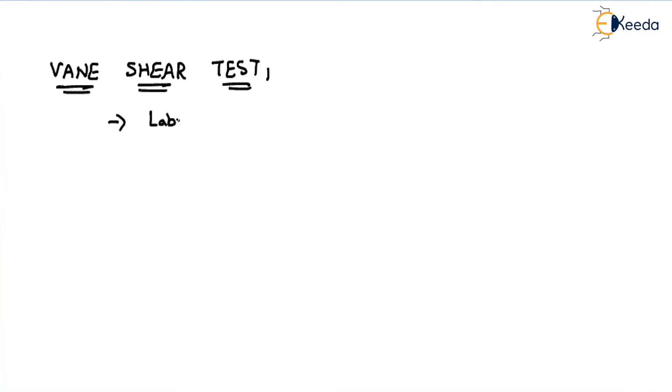In the previous lecture, we discussed the unconfined compression test. In the present lecture, let us discuss the vane shear test. This vane shear test can be conducted in the laboratory as well as in the field. So first of all, let us discuss the advantages and the disadvantages. In this test, there is no mechanism to measure the pore water pressure. That's why it is essentially an undrained test.

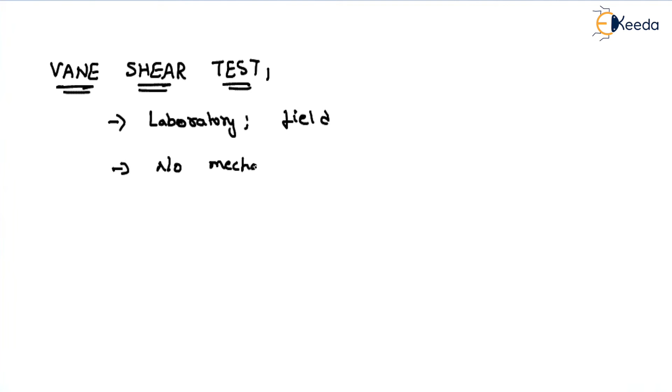So in this test, there is no mechanism to measure pore pressure. That's why it is always the undrained test. And what is a vane shear test? There will be a steel rod. On that steel rod, the vanes are attached, and we rotate the steel rod.

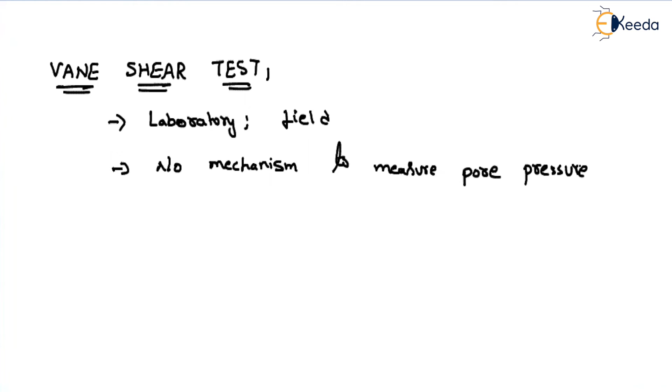As the vanes are rotated, the soil will offer some resistance. That resistance will be measured depending upon the torque applied on the steel rod. If the soil resistance is reached, then the vane will start rotating freely without showing any resistance. That stage is called the failure stage. And this is what the vane shear test is about.

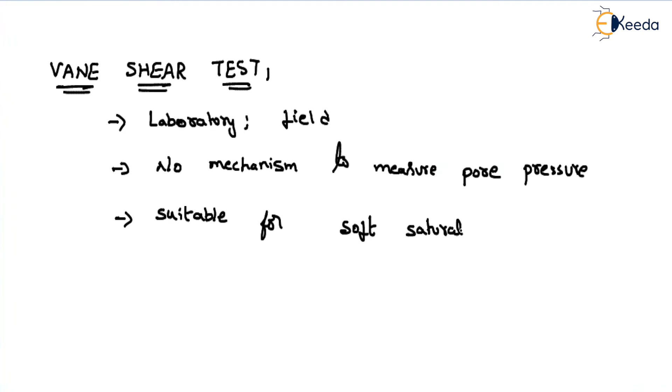One more point is that this test is mostly suitable for soft saturated clays and silts. All these points we have to learn by heart for the exam. They can ask you 1 mark questions. And the mechanism is the same for the laboratory and for the field.

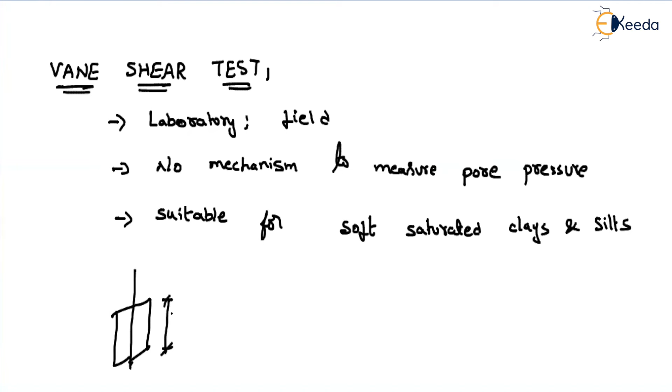There will be a steel rod, and vanes will be attached to it. Let us say the height of the vanes is capital H, and the total diameter of the vanes is capital D. Then we put this in the borehole and apply the torque until the soil reaches the maximum resistance. Whenever the soil reaches the maximum resistance, the steel rod will start rotating easily.

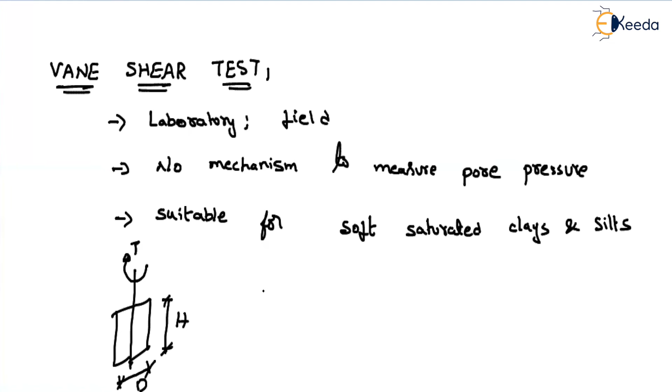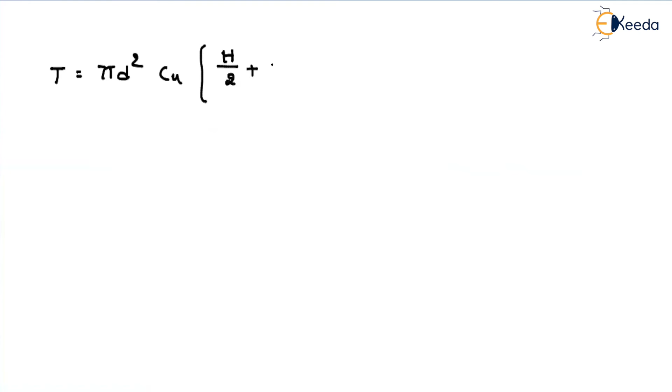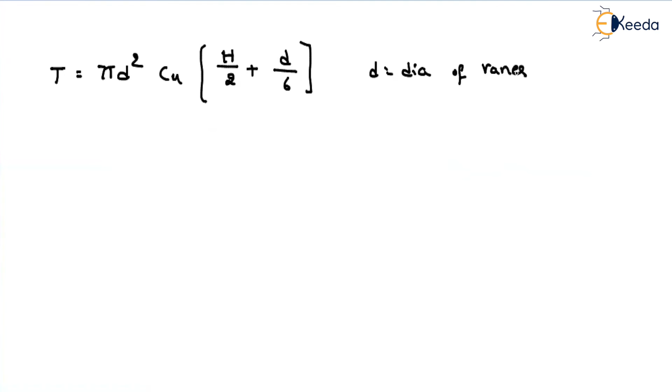So here the shear strength is correlated with the torque applied on the system. Let us say T is the torque applied on the vane shear; that will be equal to pi d squared into Cu into (h by 2 plus d by 6). Small d is the diameter of the vanes, h is the height of the vane, and Cu is the undrained cohesion value, since we can conduct only the undrained test.

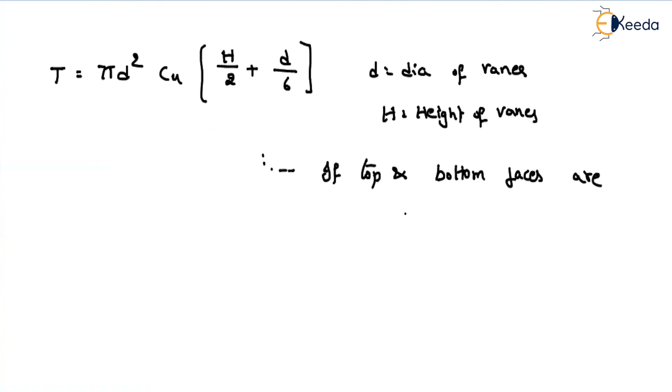This is the formula we have to use if top and bottom faces are involved in shear. It is not always possible that the top and bottom faces will be involved in shear. Why? Suppose we want to measure the shear strength in a borehole; after making the borehole, we keep the vane shear in the borehole.

So what will happen at the top of the vane shear? Will there be any resistance? No, because the soil is already excavated. So in cases like a borehole, only the bottom faces will show resistance to the torque. In all possible cases, both may not be involved in the shear. If they are not involved, then the torque is pi d squared into Cu into (h by 2 plus d by 12).

This is only if bottom faces are involved in shear. Is there any possibility that only top faces will be involved and bottom faces are not? Practically, you cannot find such a case. So if both top and bottom faces are involved, the only change is that we use d by 6. If only bottom faces are involved, then we use d by 12.

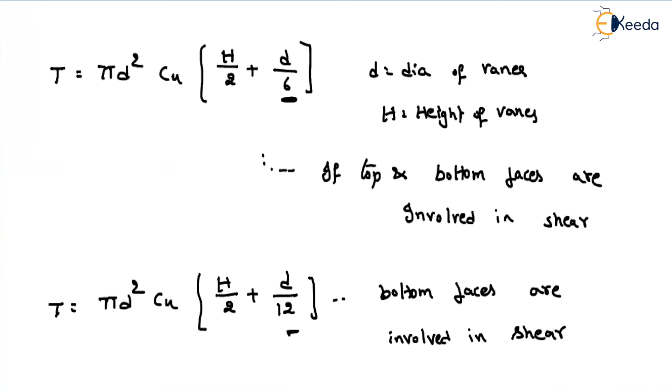As we already discussed, it is suitable for saturated clays and silts, so what about the phi value? We can take phi equal to 0. That implies the shear strength of the soil is the undrained cohesion. And this is what the vane shear test is about. In the next video, we will discuss the pore water pressure parameters.